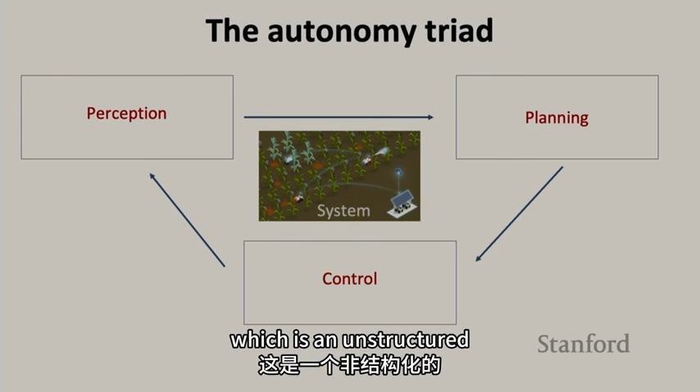The way I look at field robotics or robotics overall is kind of this triangle, right? You have perception, planning, and control, and at the middle of it is the system. One of the key things I really believe in is that all of these things have to work together. In order for them to work in the field, which is an unstructured, unpredictable, dynamic environment, they have to be in a way that they adapt and work together.

This is an example of some of the work I used to do back when I was at Georgia Tech. It's an aircraft that is flying, and then suddenly, in midair, it throws half of its wing off. What happens? This is the reason why we have pilots in airplanes - what happens when such emergencies come up? So how can we create autonomy algorithms that adapt to these changes, that work through these uncertain environments, and bring that AI that's on there to the extreme?

Back in the day when I did this, a lot of it was model-based, using predicted models of how the aircraft would behave, planning and doing control based off of that. And you see it actually stays in the air and enters this stable limit cycle. This is the Georgia Tech Twin Star aircraft, which has about a 2-meter wingspan, and keeps flying with half the wing off - and with half the wing off, half of the aileron is off. The journey for me since then has been, how do you bring this adaptability into robots so they can work in real world environments and deal with real challenges and do useful things?

Overall, I'm not the only one - there's a pretty large community that works on field robots. When you think of field robots, you kind of think of these types of things, right? Legged robots, bipedal robots, driving robots. I've been a part of several workshops.

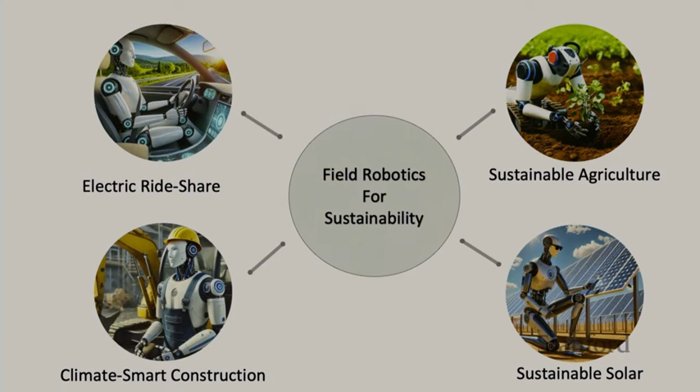But I purposefully picked these pictures because you see there's these humanoid robots trying to do things. Just as silly as it is to have a humanoid drive a car for your autonomous driving, I want to make the point that the robots that actually end up being successful may not look anything like the robots that most people think of, and really have to be a co-design of the task and the software together.

A lot of this was inspired when I was growing up as a graduate student, by the work of Andrew Ng, and the first aircraft that did the flips, and of course Sebastian, whom I heard a lot about at MIT, because the team that competed against Stanford was MIT, which didn't win. But a lot of the effort that these early robotics engineers put in was towards co-designing hardware and software, so that we have reliable robots.

So here are my main points. Where are the field robots? They're stuck in labs. How do we get them out of the labs? We need to think about scaling up, continuous learning and adaptation on the fly, and performance in the open world, not in structured environments, and common sense.

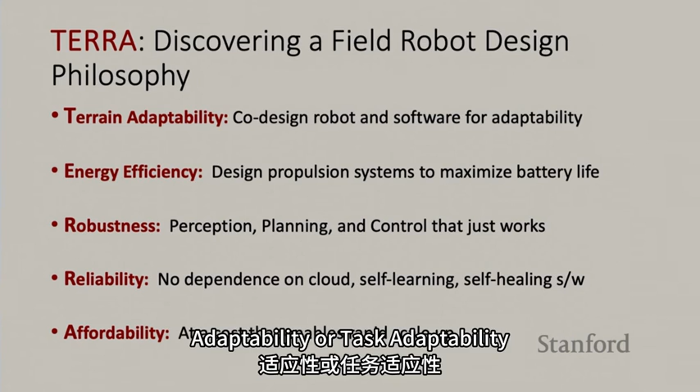Towards that, the journey to date has been discovering a philosophy, which I called the TERRA philosophy. The T stands for terrain adaptability or task adaptability, E for energy efficiency, R for robustness, reliability, and affordability.

So what I'm going to do now is show you four or five examples of robots that we created while discovering this philosophy, describe the journey and the impacts that these robots are right now causing. First we'll start with agriculture.

Agriculture, as you know, California is huge in agriculture, one of the largest agriculture producing states. The agriculture here is quite different than that in the Midwest, where we do a lot of corn and soybean agriculture. The key tenet of the agricultural robotics work I'm doing is that there's this labor bottleneck that's causing unsustainable practices to be used. The idea is that robotics and AI will help alleviate those labor bottlenecks.

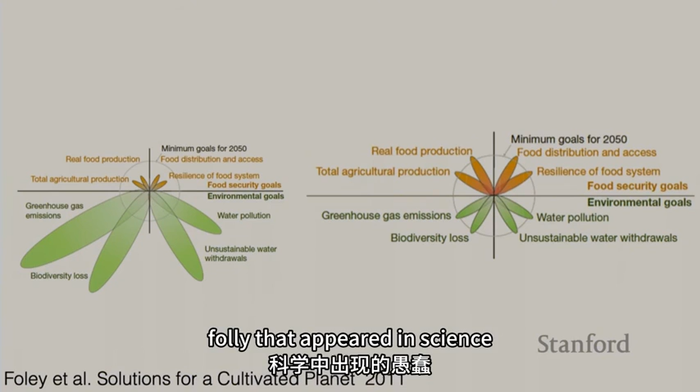This is an interesting paper by Foley that appeared in Nature. It talks about what is the cost of producing food today compared to the amount of food we're growing. You might have heard how we're going to be 10 billion people in the next few years, and that's going to be a big problem. We need to increase the amount of food we're growing, but we also need to control the cost - the environmental cost: greenhouse gas emissions, biodiversity loss, water pollution, water withdrawals. This is called sustainable intensification.

So how do we do this? One of the most unsustainable crops out there is corn. There's 200 million acres of it in all of the I states, and it's what we call a large-scale monoculture - you take large swaths of land, clear it of everything else, and just plant corn. Because you're moving the prairie away from its natural state of equilibrium, you have to put a lot of chemicals in to make that work: herbicides, fungicides, fertilizers.

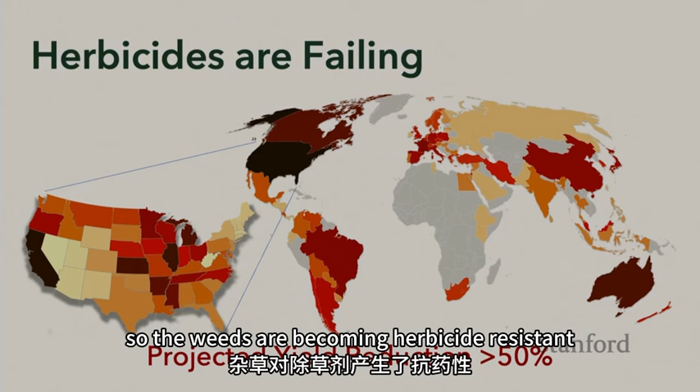But the problem is that this system of large-scale monocultures is not only unsustainable, but it's failing. You might have heard of pesticides in your waters, but there's also a huge challenge with herbicides that folks are using - the weeds are becoming herbicide resistant. This isn't mythical, you actually see it now. If you drove down in Champaign a few years ago, we didn't have a lot of weeds visible. But now, close to the end of the season, you see these weeds popping up out of the soybean crop, to a level where sometimes it's impossible to harvest.

This, according to some people, is a real doomsday kind of situation - the large equipment that we use to enable these large farms. A normal farmer in the Midwest will have 2,500 acres of land under control.

It is not contiguous land. It is parcels of land distributed all over the place, and the only way they get anything done is by using these very large machines. But these machines cause soil compaction, erosion, and nutrient loss. And on the other side of the world, if you look at another very unsustainable crop, palm oil, crops like that cause significant deforestation and loss of biodiversity.

And even with all of this, just with corn and soybean, the trends are that our yields are not actually matching the demand.

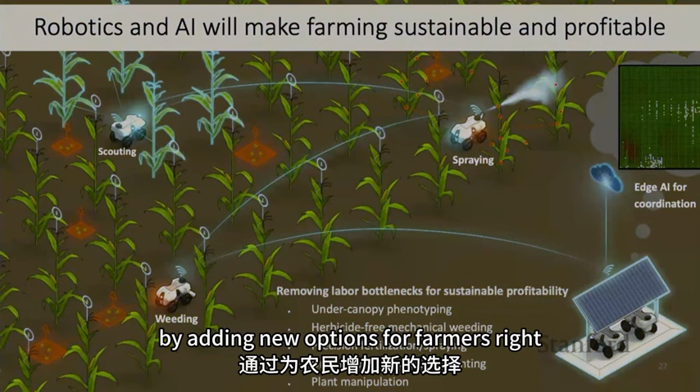So one way to address this challenge is by adding new options for farmers. Today farmers can either use manual labor or use large tractors. Manual labor is great for small-scale farming, large tractors are great for very large-scale monocultures. There's really nothing in between.

So one of the ideas we started thinking about 6-7 years ago was, can we use a number of small robots that can work together and do things that are today not possible due to unavailability of labor, such as phenotyping, mechanical weeding, cover cropping. I'll talk a little bit about some of these things.

And this idea of robots in agriculture is not very new. People have been talking about this for at least 10-15 years, but it's very challenging. Even though there's a number of companies out there trying to do it, the problems are really hard because the scales are very large, the field is very messy, and whatever data there is, it's not really representative of what actually happens in the environments.

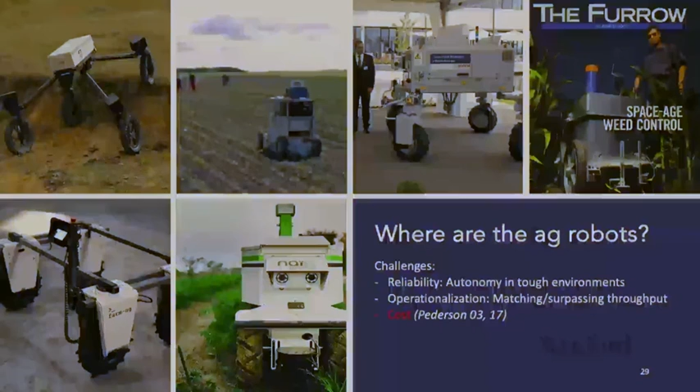So where are the ag robots? Even though you see a number of these companies coming up and robots coming up, we haven't really seen large-scale adoption. And if you really peel the onion, and there's a lot of interesting work on this, everything boils down to cost.

So we cannot use the same ways or methods that we're using for autonomous driving, in which we're using a lot of sensors, kind of over-sensing the problem, mapping everything out. We have to find ways in which we can reduce the cost while also making the robots work.

So this is something we came up with, this idea of levels of autonomy for robots. We need to grow up the levels, and about level 3 is when we have what some people call the MVP, the minimum viable product, because you're using a team of robots to basically get the work of a single tractor done. You need to also at the same time bring the cost down.

So now I'll give you the first example of how we've been trying to do that. This robot is called TerraSentia. We have made about 80 of these, and I think you were involved in this robot. These are actually deployed in the field.

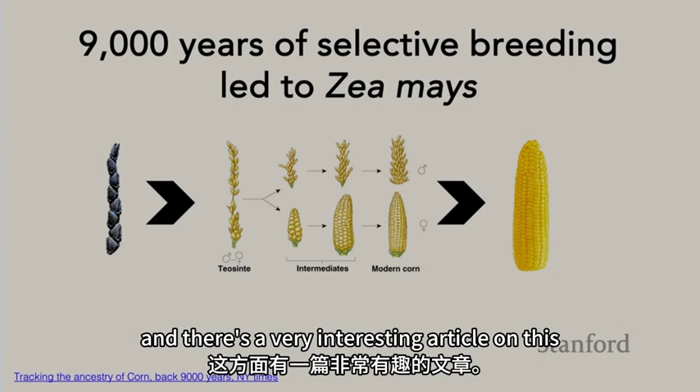So corn, which is everywhere in the Midwest, turns out it's actually not a natural crop, in the sense that if you go back through the history of agriculture, you won't find a natural ancestor of corn. What you find is this thing called teosinte, which looks nothing like corn. But the Native American people in South America selectively bred teosinte with other crops to create corn. There's a very interesting article on this in the New York Times.

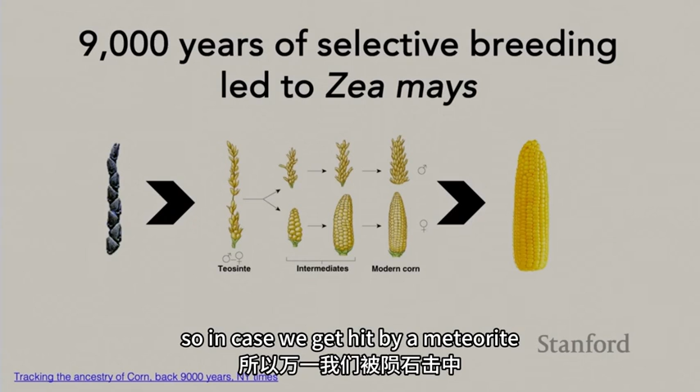It turns out that only about 3,000 years ago the latest varieties of corn were created. And right now, even under the North Pole, the modern varieties of corn are stored, so in case we get hit by a meteorite, we don't have to go 9,000 years back.

But of course, that pace of breeding cannot keep up with what's happening today. So the only way you can make a single farmer deal with 2,500 acres is to create seeds that are super adapted to the environment.

So in India, this is a joke that I used to make: in India, if a bug eats a plant, the plant dies. But in the Midwest, if a bug tries to eat a properly bred corn plant, the bug will die. So that's the idea, but the pace is just not matching up.

So in order to feed the world, we really need to accelerate this pace. To do this, modern crop scientists use a technique called genome-wide association, along with other techniques. What happens there is that you sequence all the genomes, measure the environment, and look for the patterns in the genomics that represent specific phenotypes.

For example, disease resistant, yield, right? And once you find them, your job is to use techniques like CRISPR to create the crop that accelerates those traits. But we don't have a model, we don't have a simulation of plants.

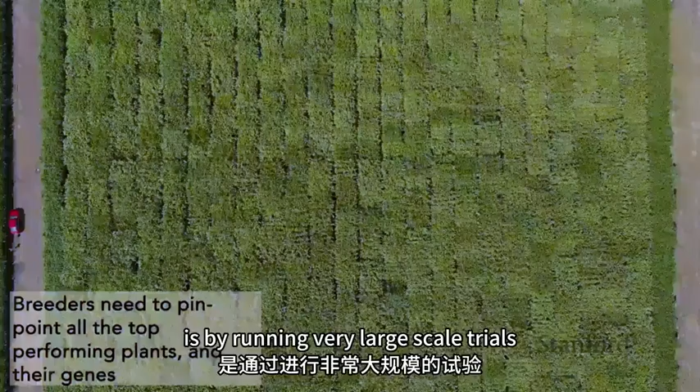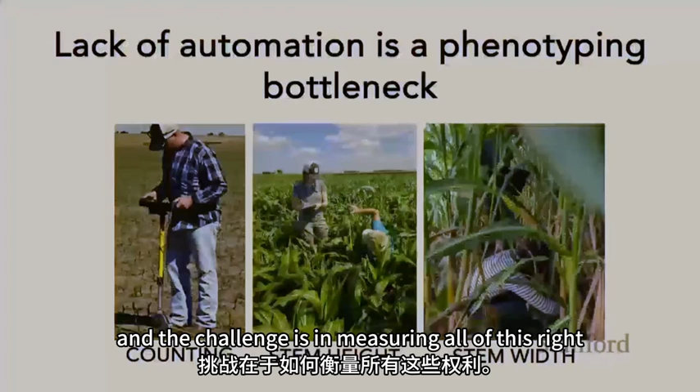So the only way you can do that is by running very large-scale trials. These companies run hundreds of thousands of acres of trials. This is one example of a 90-acre trial, a sorghum trial. Each of these blocks is a different variety of the crop, and they're being compared against each other. The challenge is in measuring all of this.

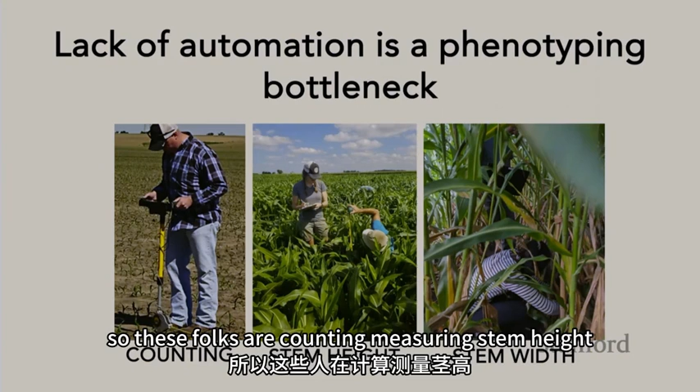So you get quantitative data to know which ones are doing better. Today, all of those measurements are manual, and this results in what we call the phenotyping bottleneck. These folks are counting, measuring stem height, stem width. These are really difficult things to measure and take forever. You can automate that using gantries or drones, but neither of those see under the canopy, which is where robots come in, but most robots are over the canopy.

So in 2017, we introduced this 3D printed robot called TerraSentia, which won the Best Systems Paper Award at the Robotics: Science and Systems conference. The idea was a small robot that can go under the canopy and use machine learning techniques to do simple phenotyping. In this case, it was counting.

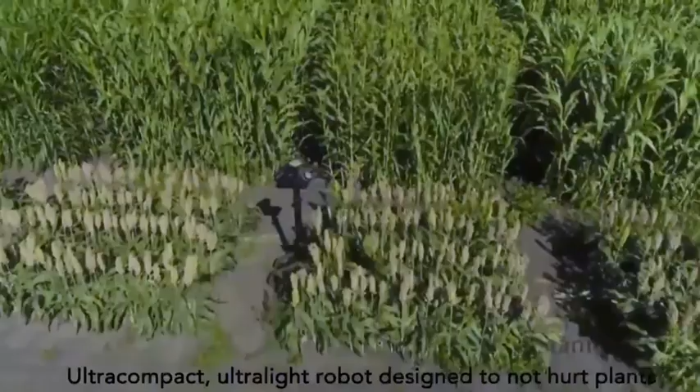The genesis of that robot was that before we started working on it, these were the kinds of robots that were out there. This is a robot made before I came to UIUC. It's a tracked robot, and people were using all these kind of best practices. People thought you have to make a tracked robot because it's the field. But you see here, this robot kind of drags that plant down.

You have to put a mast on it because you want to see down, and you have to put the most expensive sensor that you can find on it. But the reality was that while that was an expensive and interesting robot, it actually didn't do the job it was supposed to do.

So that's where, as we learned from the world of drones, miniaturizing a helicopter was not the solution. We had to come up with a drone which is not something a human would fly, because it's impossible to fly until you put an IMU on it. So a student of mine came up with this idea: why are we trying to do all of this? Why don't we just take our drone and make it run on the ground? But obviously you cannot fly it through there because the endurance just wouldn't be there.

So we came up with this 3D printed robot, and I think it was just a very basic idea of taking those motors and flipping them down, each having their own motor, with no other moving part, and then putting a camera on there to see how well that works.

We made, who knows Steve Blank? Anyone know Steve Blank? Lean Startup, right? Stanford person, right, who created this whole philosophy of Lean Startup.

So we had an NSF I-Corps project, and we went and engaged with customers. We made 30 of these 3D printed robots and gave them to customers, and said, okay, we'll go use them in the field, we'll see how well that works. And literally some of them melted in the field, because field environments are very difficult.

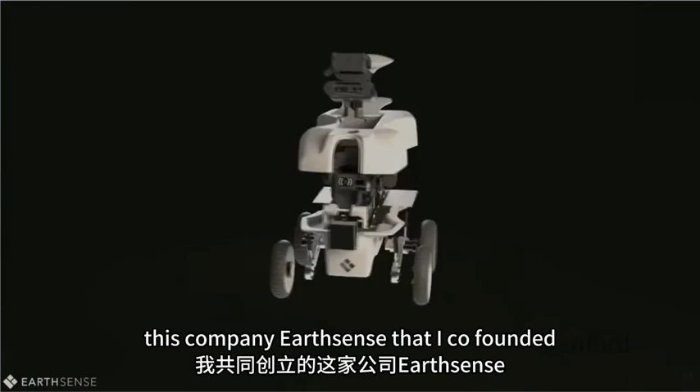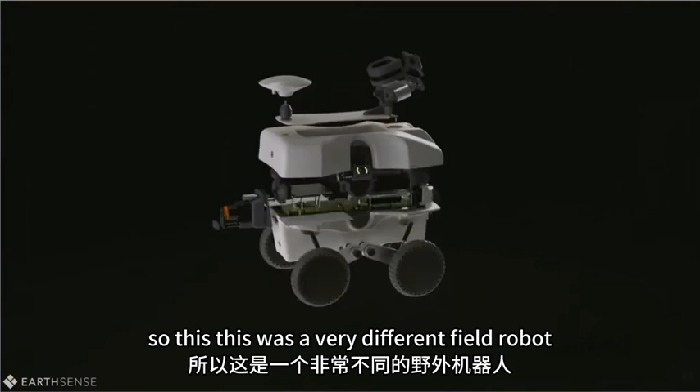So at around the same time, this company EarthSense that I co-founded took over that project and became a technology partner in the ARPA-E TERRA-MEPP project, and created this robot called TerraSentia, in which Rajan was a part of creating the drivetrain. So this was a very different field robot compared to the ones that were out there.

It was made with hub motors, so each wheel was itself a motor. There were no connections other than that, so directly you connected your arm to the wheels. These motors, because they're hub motors, are contactless, brushless hub motors. They can go through water, snow, and all kinds of different terrain, and the robot was extremely tough, as shown in this example. This was, I think, the 2020 or 2021 version of that robot.

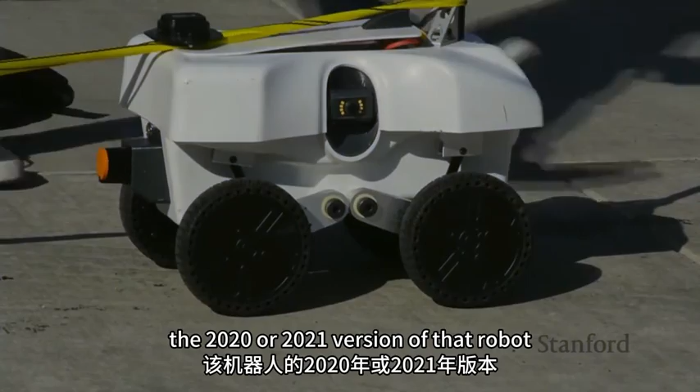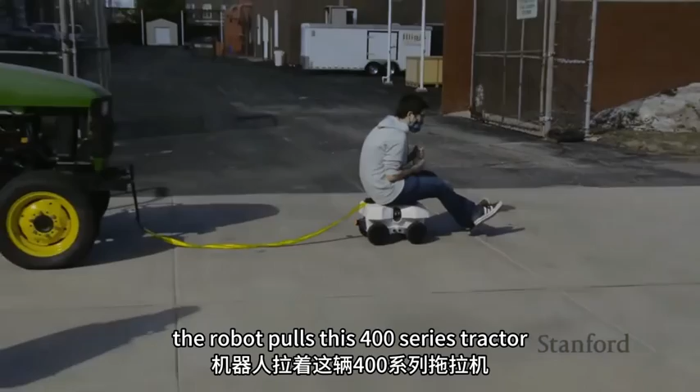We iterated across 3 years, and every year we try to improve the robot, finally bringing it to this level of maturity. So this is one of our engineers just loading up the robot with some weight. The robot itself weighs no more than 20 kilos. Then he's sitting on it, and the robot pulls this 400 series tractor. I think it was very interesting getting into the design space there and figuring out how we can use electric propulsion to make sure we pack a lot of power into very tiny machines.

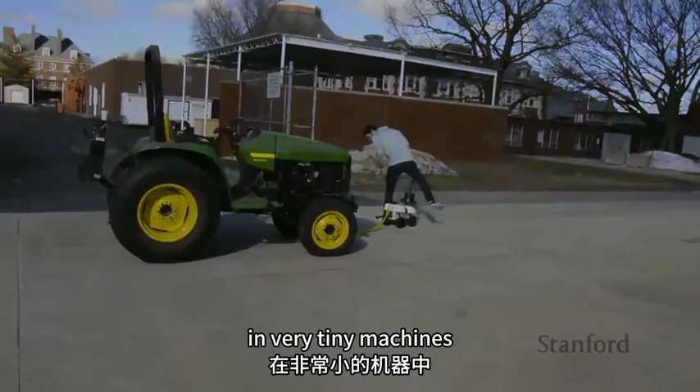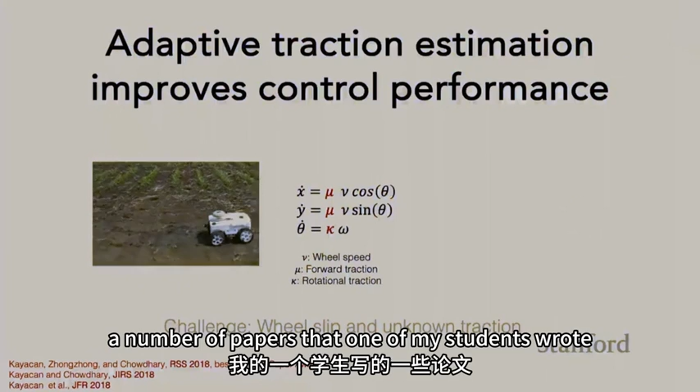That was one part. The other part was trying to get these robots to be autonomous. The standard way of doing that is with Global Positioning System, GPS. It works great on John Deere AutoTrac and Trimble's GPS systems because they have a clear view of the sky. But once you go under the canopy—and we did a lot of work on this, part of a number of papers that one of my students wrote, who's now a professor at University of Oklahoma—we figured out traction coefficients in real time and used them to improve control, using techniques like model predictive control and receding horizon estimators to really improve the accuracy of GPS. But the problem is, once you go under the plant canopy, whereas with real-time kinematic RTK GPS you're supposed to get under 2 centimeters accuracy, the accuracy drops to 40 centimeters.

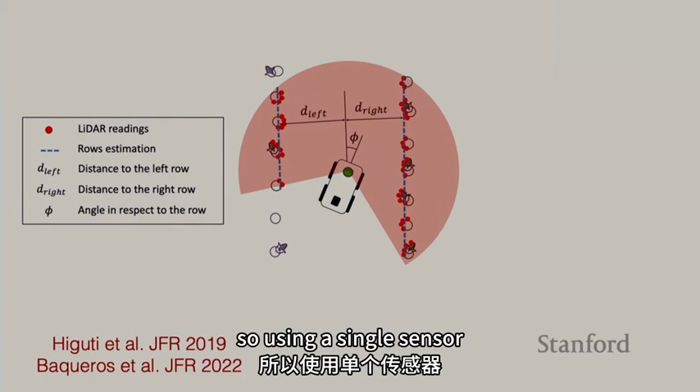Because the signals bounce off of the plants, we started around 2019 working on how to solve this problem using exteroception. We posed this problem as a row-following behavior problem: using a single sensor, can we figure out the distance to the row and the angle to the row?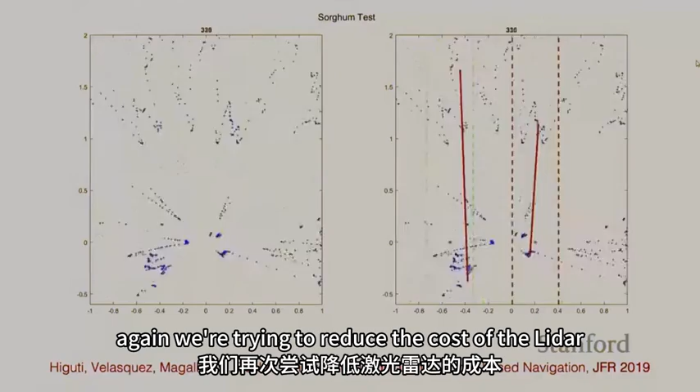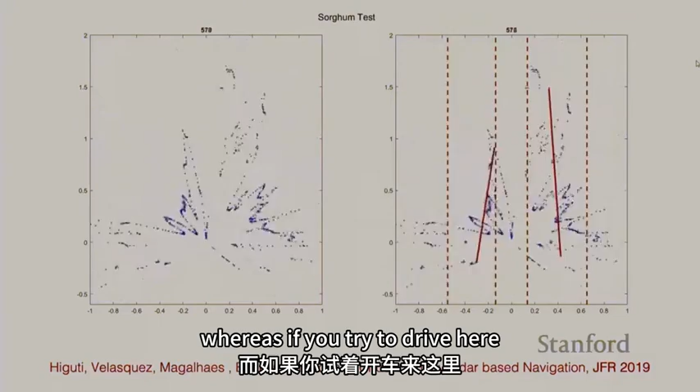In a setting like here, this is a LiDAR point cloud. The LiDAR is here—again, we're trying to reduce the cost of the LiDAR, so it's a $1,000 LiDAR. These are all the plants here, and you see it's a completely messy point cloud. Whereas if you try to drive here, you'll get a very nice line on which you can fit a line. So fitting lines on that LiDAR point cloud was one of the first key challenges we had to solve.

That's explained in this paper here, and we came up with a method that was basically an accelerated form of line fitting in the presence of outliers, and then we created that and put it onto the robots. This is an example of me giving that robot a hard time as it's driving down the field with this algorithm on it.

This is kind of where we started forming this philosophy that, okay, you can write a paper, you can create an algorithm, but the real test is to go out there and see—can you kick the robot? That's what I tell my students: your robot has to be kickable before you can graduate.

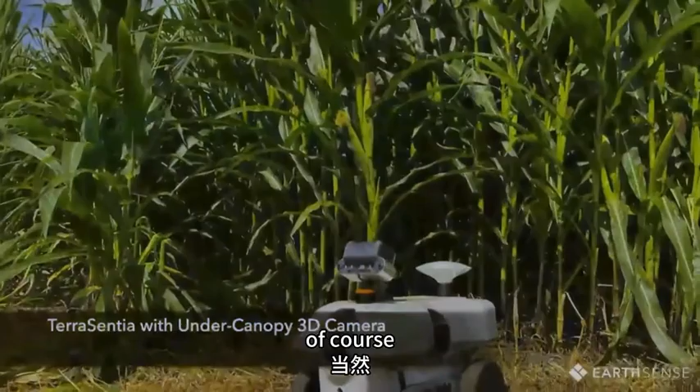Here you can see it's a very tiny sensor right here, and the plants are all around it. With this EarthSense, this was just a part of it. Of course the company did a whole other set of development that is proprietary, but they created this first product that started to make sense in the space of agriculture.

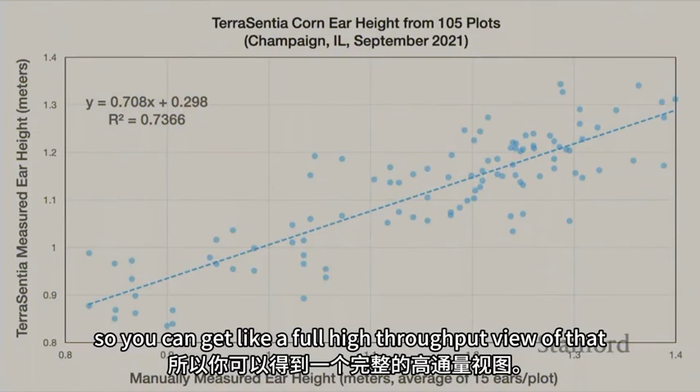So taking that same idea—this is just measuring, and it's limited to crop breeding. We wanted to bring that idea to farmers. In the Midwest, agriculture is very seasonal. Right now, when I left Chicago, the temperature was 18 degrees Fahrenheit—it's freezing, and there's basically nothing that lives. So from basically November all the way into March, we leave these 200 million acres entirely bare.

Before planting happens around June or late May, weeds come up and the soil degenerates and all kinds of things happen. But there's a way this soil could be doing useful things.

You can grow cover crops on it, and cover crops can do a number of things. They can sequester carbon, fix nitrogen, hold nitrogen that's excess, and break up compaction. So different types of cover crops can do different things.

There are also cover crops that can be used for harvesting, like they can create biomass that can be used to create sustainable aviation fuel, for example. But most farmers are not able to do it.

This is around Thanksgiving. If you try to land in Champaign, you see what I call the corn and soybean desert—just acres and acres of bare land.

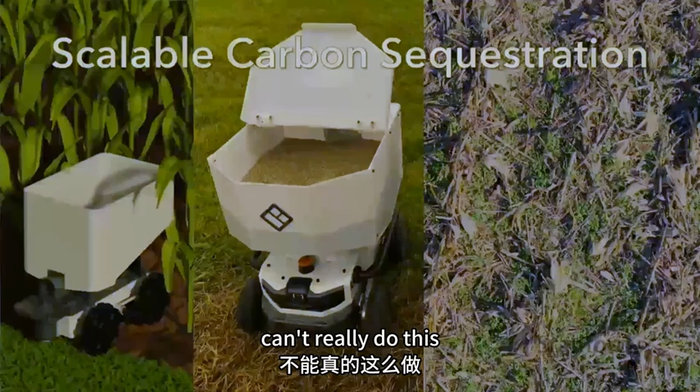So we had this idea: what if we created a robot that could go through the canopy and broadcast seeds? Using the same kind of technology we were using, but broadcasting seeds so we can have cover crop planting done as early as August in standing corn.

With a lot of economic analysis, we can show that it can be done at a much lower cost. But the problem is you need to bring the cost of the robot further down, and you need to make it more reliable.

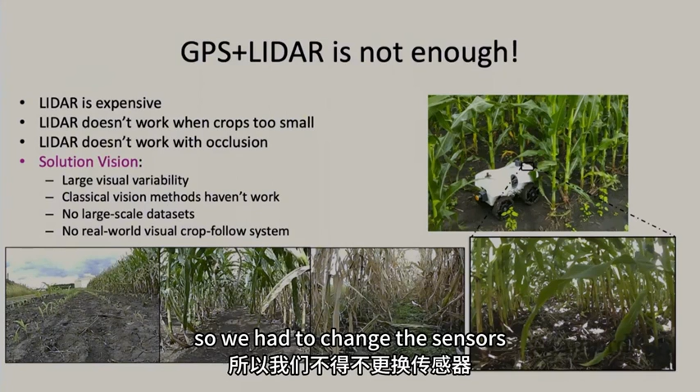So LiDAR-based autonomy is just not enough. We had to change the sensors and think about using cameras. These cameras cost $30, whereas the LiDARs cost about $1,000.

But that's a very challenging problem, because fields are really messy when you try to do it with monocular vision. So we worked together to create a method called CropFollow, and Arun, who is about to graduate, worked on this.

We thought about many different ways of doing it. One way is using techniques like reinforcement learning, where you basically learn everything from scratch and try to see how that whole setup works. But the problem with that is it's really difficult to debug.

In this high mix, low volume manufacturing setup, these robots are individually very different, and because of that, it becomes very, very hard to find where the issues are. Of course, we had a fully working system also.

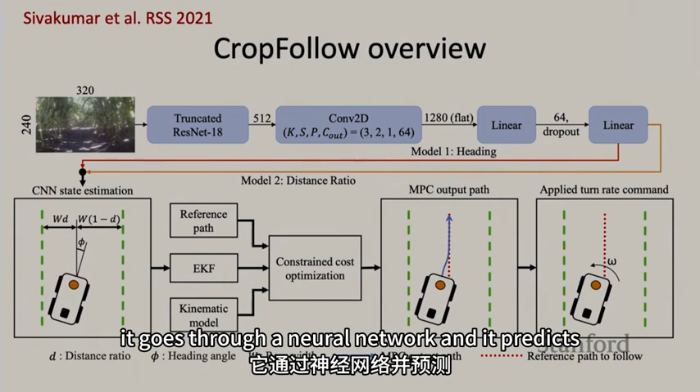So what we did is we just swapped this distance and angle estimation with vision. We said: can we find distance to the row and angle to the row with a single vision? So you have a single monocular camera—an image from the camera goes in, it goes through a neural network, and it predicts the distance to the row and the angle with respect to the row.

This was back in 2019, and we did it with labeling—heavily supervised learning. We labeled about 26,000 images, using all kinds of techniques where you can correct the image when you don't see the horizon. We use the plant as the way of seeing the horizon, measure the roll and pitch, and then get a good estimate of where the crossing points are.

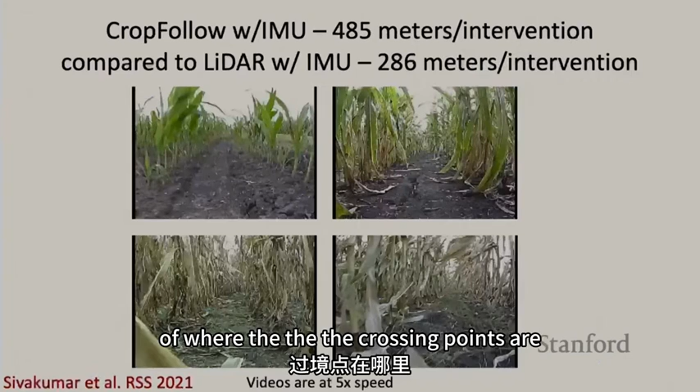We used that to train this model, and then we started testing it in the real world, and it worked really well. These are some examples of this vision-based autonomy. You can see the terrain is really challenging, and the robot is able to tolerate early season, late season, a small curve, and significant occlusions.

So we deployed this, and this is Arun—you can tell he's ready to graduate because he's starting to kick his robot now. He's a lot more gentle, although there's a number of other things that were also changed.

As you can see, the robot is also controlling its speed now. There's a little planning module on there which is trying to control the speed as well as the angle of the robot to make sure that it's going on its path.

Can you see the plants? This is early season soybean. Obviously the LiDAR isn't working because the plants are not as tall as the LiDAR. And then after a while, the robot will enter early season corn.

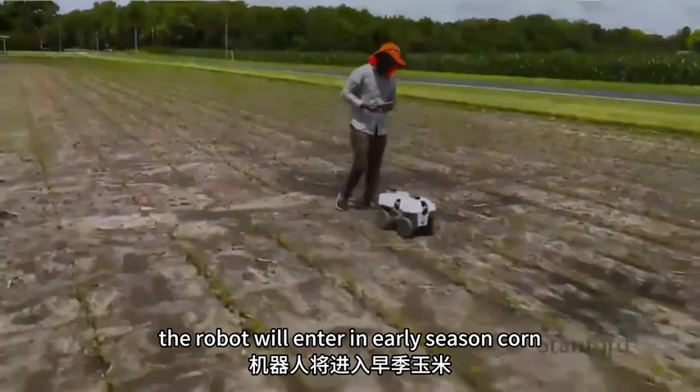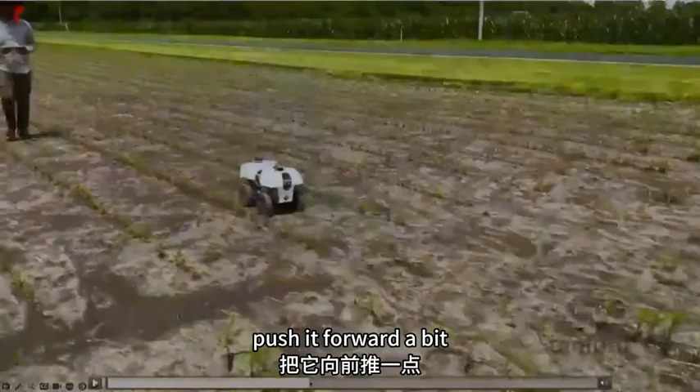The same, just going straight. This is at the Farm of the Future at Illinois. So anyway, let me see, just push it forward a bit. Yeah, so it just seamlessly transitions into early season corn and continues to go.

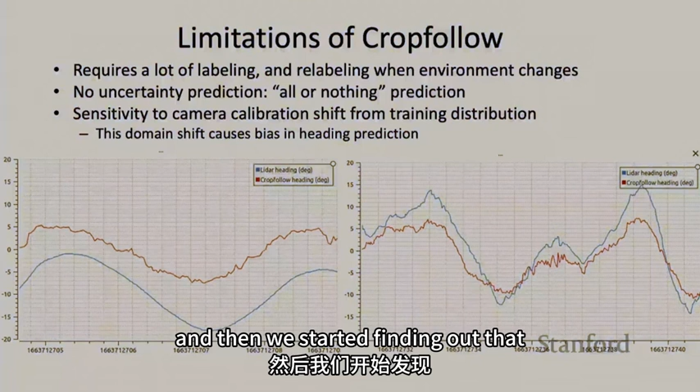So this was great, and then we took this and several other methods and tried to do a large scale experiment with it. We started finding out that even though everything worked great in the paper, and we got very large sets of validations in an RSS paper, about 25 kilometers I think, the fact is that when you deploy it beyond that, we started to see a lot of issues. One issue was that the environment changes.

There's really no uncertainty prediction. Because the environment changes, we basically end up with a domain shift. And because the cameras on these robots are differently calibrated and installed with slight defects, what works on one robot doesn't work on the other. There are little biases that creep up.

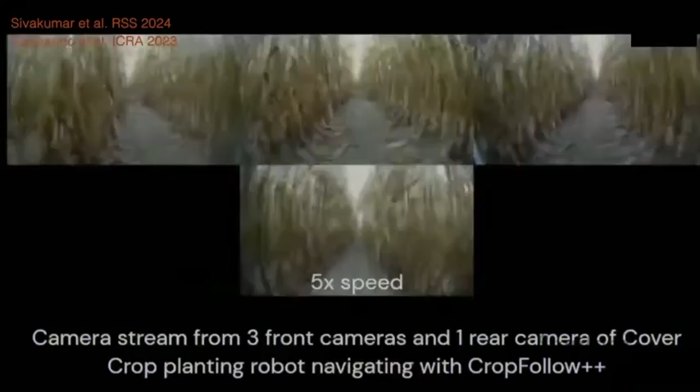So last year, this year, 2024, we published another paper called CropFollow++, in which instead of doing the full angle to row, we're basically creating a confidence estimate of where the horizons are - so 3 points: the end of the horizon point, and the 2 points here at the side - and then combining that with AI to detect failures and recover from failures when they happen.

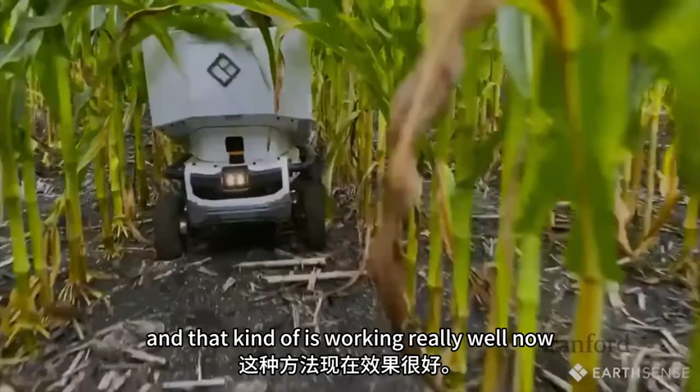So this is an example of that happening. There were two sets of papers: one was the 2024 RSS paper, and the other was the ICRA 2023 paper, which kind of put that together. And that's working really well now, and that's what creates this idea.

So you have a robot which can go through standing rows of corn and distribute seeds of cover crop together. And there are new types of distribution methods that are now coming out. Each robot can cover 9 rows - 4 rows on one side, 4 rows on the other side, and the row that it's in.

So if you have 10 robots, you can cover 90 rows at the same time. Driving at about 1 meter per second, these robots can get a whole field planted in less than 5 hours - a whole field the size of 100 acres. So that starts to compete against other methods. And by the time you harvest, there's already a standing cover crop there.

We have a large grant now to try and scale this up, with a target of many thousands of acres next year, and trying to really bring this technology to fruition.

Now I'll talk about another example of the Terra philosophy with a robot called TerraMax. This is now all the way on the other side of the world in Malaysia, in palm oil plantations. Palm oil is one of the most consumed oils - apparently 50% of supermarket products have palm oil.

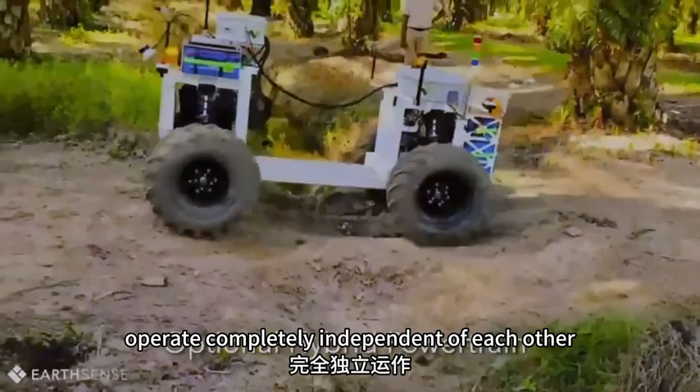It's a 500 kilo robot, much larger than our other robots. It still uses the same types of techniques - individual wheel motors, no variable transmission shaft, so there's no transmission. The four wheels can operate completely independent of each other, each with their own suspension. It can tackle really challenging terrain, and the middle part is open for putting different types of payloads. In this case it's a fertilizer bin, and you'll see it does some fertilizer spreading. It's a fully electric, battery-operated robot, and we're learning a lot about optimizing the motors to do this. Just as a comparison, that's Terra Sentia, and that's TerraMax - it's a totally different robot.

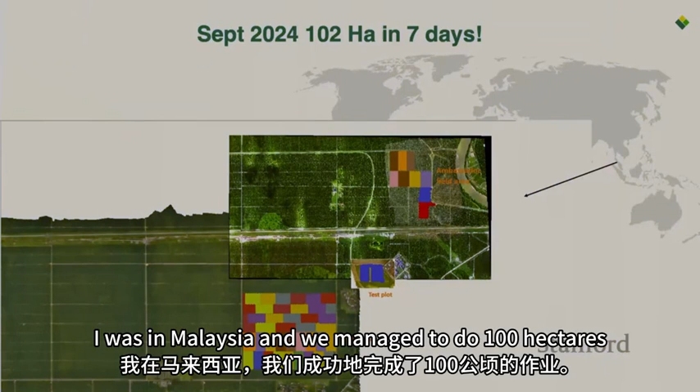So in September I was in Malaysia, and we managed to do 102 hectares in 7 days. It was a challenge set forth by the industry to see how scalable this technology would be, and it was quite exciting. Here's just some snippets.

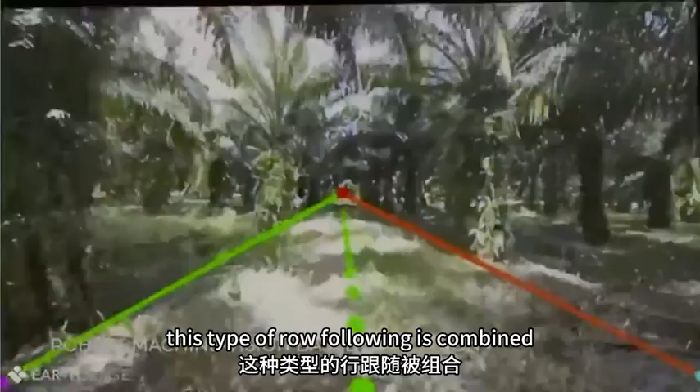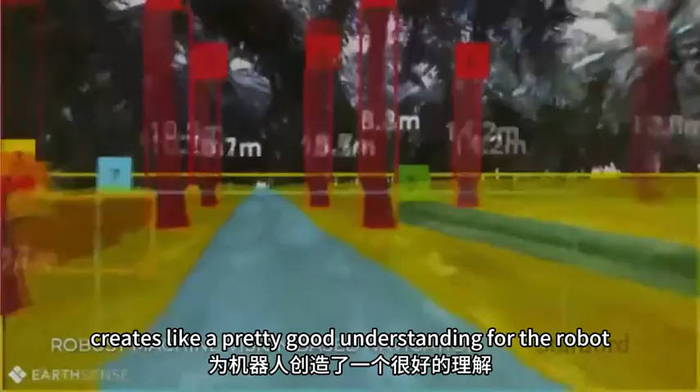From a research perspective, these robots use some of the techniques I talked about, but way more than that. They ended up using a technique where row following is combined with semantic segmentation. Large-scale semantic segmentation combined with row following creates a pretty good understanding for the robot of where it is. That's combined with the GPS data it's getting, and then it's detecting individual trees, distance to the trees, and executing maneuvers.

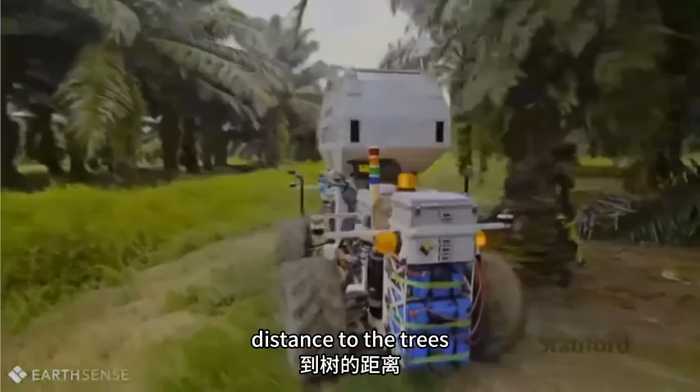It's quite challenging because there's a ditch right here, a ditch on that other side, a ditch here - it's a challenging environment. But it seems to be doing pretty well. We also have remote monitoring systems in place so we can keep an eye on what's going on and get this robot to drive autonomously.

Everything here I'm showing you is autonomous - that's the benefit of not having a transmission. The wheels are totally imbalanced, but the robot is able to go through some really tough terrain. That's my engineer - she's just delighted that it tackled that.

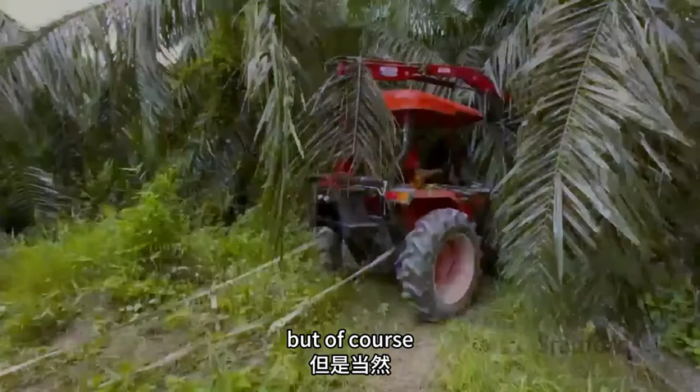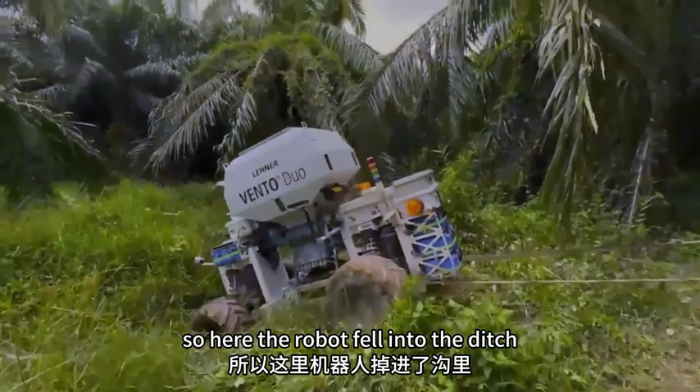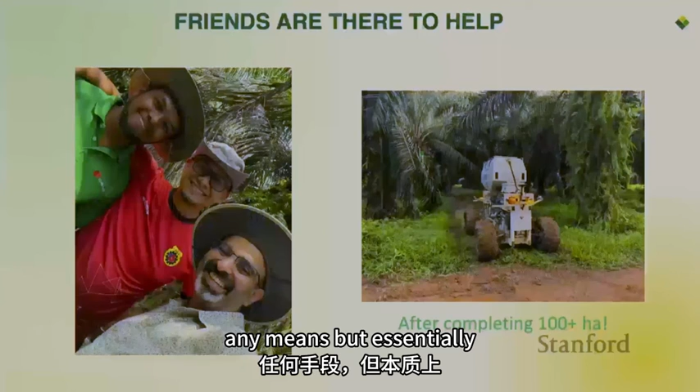It rains every day in Malaysia, so you can't avoid muddy puddles, and even with that, the robots fall down. One of the big lessons we've learned is that you really cannot try to make the whole system fully autonomous - you have to think about increasing throughput. Here the robot fell into the ditch, was pulled out by the tractor, and immediately resumed work. It was not a showstopper by any means.

One of the big philosophies coming out of it, after completing the 100 hectares, is that you really have to find ways for humans and robots to work together, as opposed to imagining robots will completely replace humans, because we're just not there yet. Even if you put the most expensive sensor you can find, you still need somebody to clean it eventually, unless you put a cleaning system - and then the cleaning system breaks. So I think we have to start thinking about robotics as an assistive technology.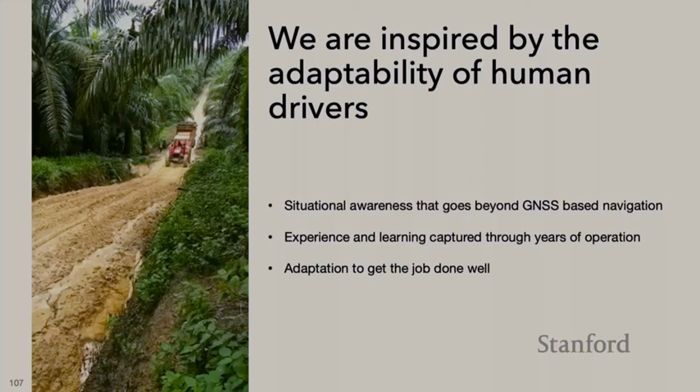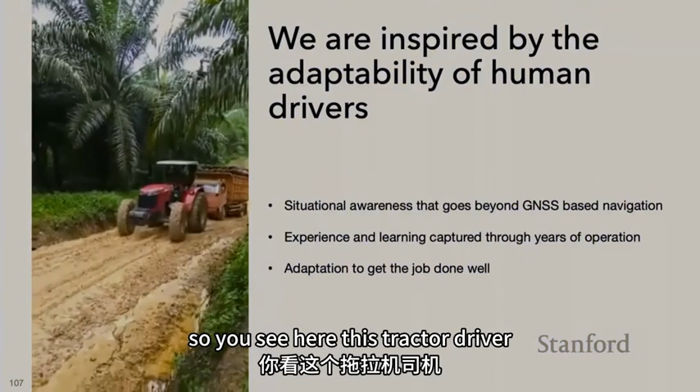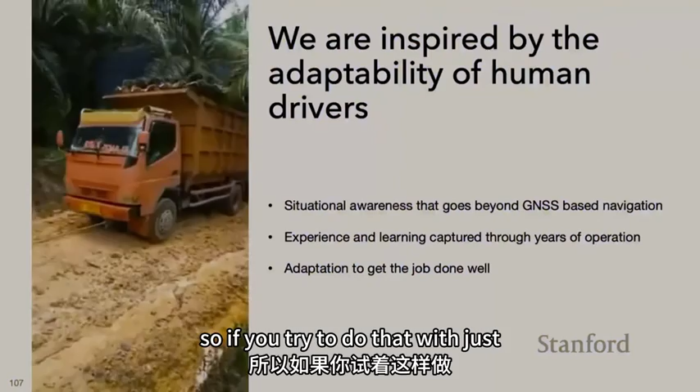The other thing I'll talk about now is some of our work in broader field robotics, algorithms for driving robots, and this method called WayFast. You see here this tractor driver, just using their eyes, is pulling this very heavy truck on completely muddy terrain. If you try to do that with just GPS or something, it's just not going to work. You have to have experience built in and real-time adaptation to deal with that.

So we've been thinking about how to encode that in software, and one way of doing that is what we call WayFast, which is waypoint-free adaptive navigation. You give only a single waypoint where the robot has to go, and the robot gets data from its sensors, like stereo cameras, and creates a traversability and traction map just based off of that data, just like a human would do.

This is a fully self-supervised method that takes in an image and creates a traction map, which becomes a cost function for a controller that then generates a path for the robot. The way we do this is we start with a standard robot model, which is really cool because we can easily swap this model whenever the robot changes, so the system is pretty scalable. And we add to it these traction parameters that we talked about before.

We estimate these traction parameters in real time, and that becomes the labels for the images that the robot creates. So in training time, the robot's driving around, estimating traction as it drives, and that data is correlated back with images. Those images are then used in the exploration stage for training. Here, for example, you can see as it's going around, the robot hits different things, and the traction it experiences is encoded by itself.

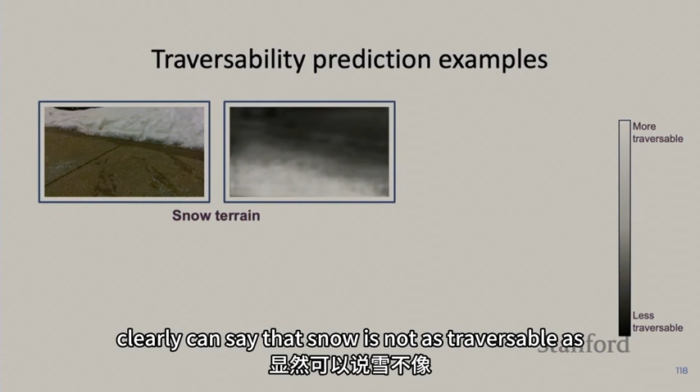So then you take an RGBD image and create a traversability map using that data. That traversability map becomes a cost function for the model predictive controller, which creates the actions that drive the robot. You see some examples here: white is traversable or with good traction, and dark is not. You can see the robot clearly can tell that snow is not as traversable as clear terrain.

Similarly with trees, and not only that, it also creates a boundary around it because it knows once it hits it, it'll get stuck. And remember, none of this is with labeling, whereas the first bit I was showing you was all with labeling. This is all happening by the robot doing it all by itself. This is, in real time, an example of how the traversability map looks like as the robot is driving around.

You can see these are the areas that are not traversable, and then these nice behaviors emerge. The robot knows to avoid the tree, which is fairly geometric. But the other interesting thing is that obstacles that are not geometric, for example this ditch, it knows to avoid based on the visual data. And in this case, it knows it can go through grass because grass is traversable.

It doesn't really lose any traction there, but when it comes to the tree, it has to avoid it. On the other hand, if it was using a LiDAR, grass would look exactly as untraversable as a tree.

More recently, we've tried to take a batch of data in real time, like a sequence of images, feed it into the network, and create a 3D traversability map around the robot. This is what the robot creates, like a bird's eye view traversability map as it's driving, and these are all the different trajectories it's thinking about and picking one of them. You can get some really cool behaviors - again, it knows it can go through grass because it doesn't lose traction, but it will avoid trees.

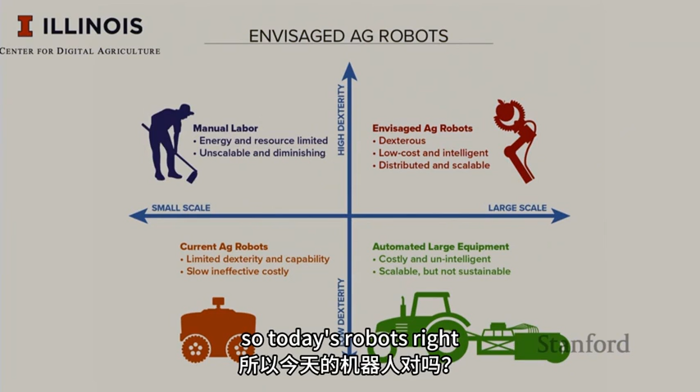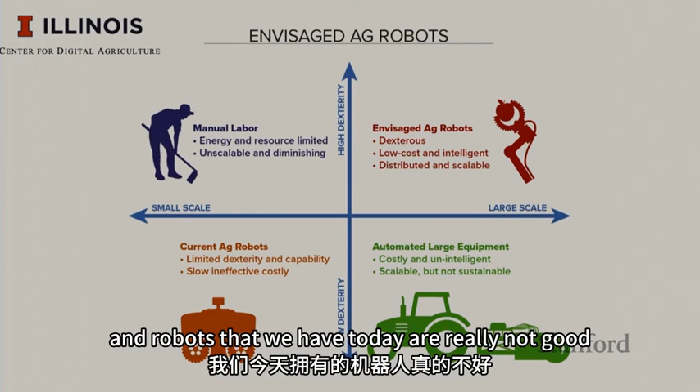Okay, this is the last bit I'm going to talk about, the philosophy of hybrid soft manipulation. Today's robots - tractors are really good for low dexterous tasks, but they scale up very well. Humans are really good for small scale tasks, they have a large level of dexterity. Robots that we have today are really not good at either of them. So the goal is to try and create robots that can have high level of dexterity as well as scale up well.

So towards that, we've been thinking about how to create different types of robots. I've been working with a friend of mine, Girish Krishnan, who's a professor at UIUC, as well as Mattia Gazzola and Sarah, who is an expert in polycultures, to create new robotic concepts that would work well in a cluttered setting like a polyculture, in which different varieties of plants are planted together so that they can grow together.

These arms are essentially called FREEs. They're basically tubes wrapped around with a filament, and each one is wrapped in a different way so that when you pressurize it, they bend in a particular way. By controlling the pressure and the wrappings on the different types of tubes, you can create muscle-like structure and bend these things any which way.

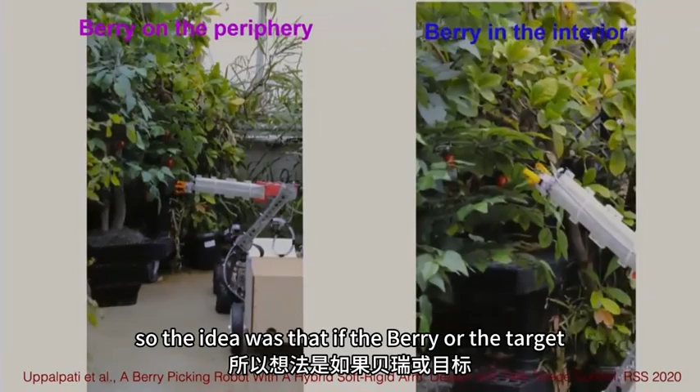In 2020, we had a paper at RSS in which we basically combined the FREE arm with a rigid arm to create a hybrid manipulator. The idea was that if the berry, or the target, is not within reach of the rigid arm, then you move the soft arm out and bend it any which way to get it.

The reason to do that is because the rigid arm is really much faster - you can move it really fast, but it doesn't have the dexterity. The soft arm can reach all these different places, but it doesn't have the speed. So can we combine it together?

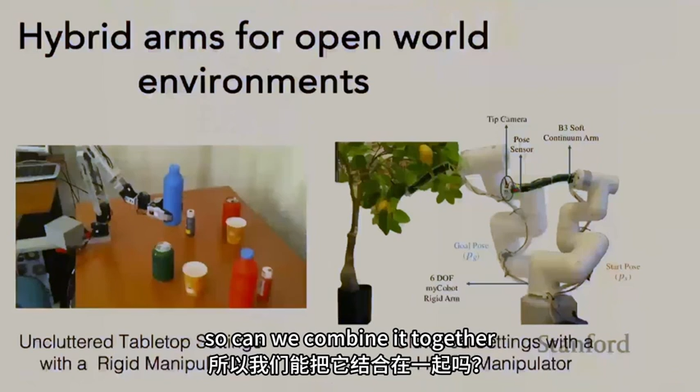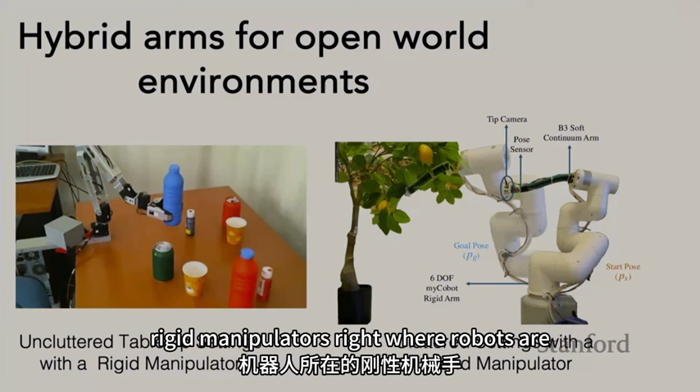I'll show you some results that aren't yet published, but hopefully soon will be, about trying to get these hybrid manipulators to work in an intelligent way. You must have seen a lot of this type of work with rigid manipulators, where robots detect objects, create 3D representations, and pick things up, and there's a lot of interesting work connecting these with large language models. We want to do the similar thing, but with these hybrid arms.

The way the pipeline works: you get an RGB image, we create a 3D reconstruction using a network called MASt3R, then there's a standard image segmentation network that can help find objects. This creates an occupancy grid, a mental map of where everything is. Then you make a path, and in planning the path you use a model of the soft arm, and this goes through another network and creates the actuation.

The idea is that by creating separate paths for the rigid and the soft part, you can make sure the rigid arm isn't bumping into or touching anything, but the soft arm doesn't have that constraint anymore - you can touch and coil around things. This work is still going on, but here are some examples of what we're seeing.

There's one single camera at the end of the manipulator in the soft arm, and we're using that to create these 3D reconstructions. I'll show you the video. In this case, the robot has to reach this bottle, and the data is coming from this eye-in-hand camera that's here, and you see that it's able to get to it.

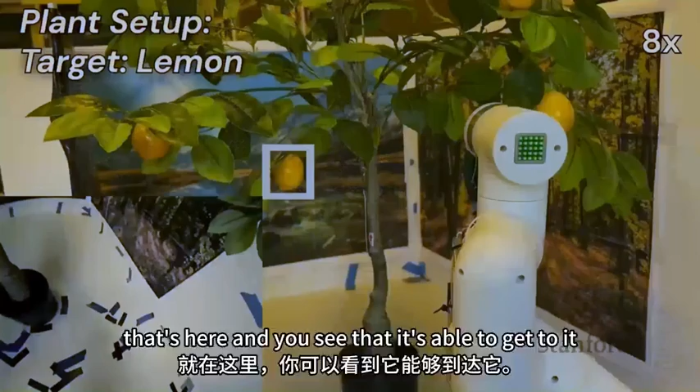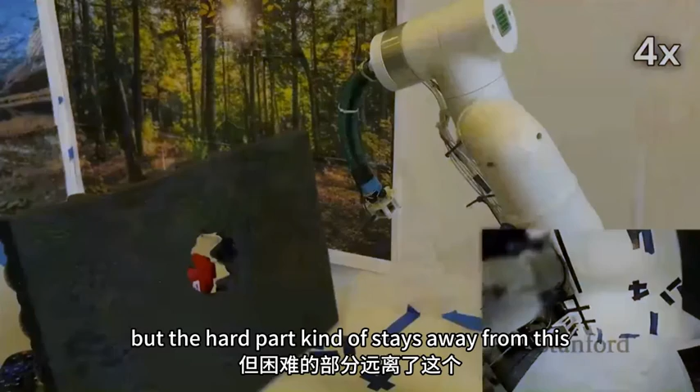In this case, it has to reach this lemon, and you see it'll basically go around that thing, moving the plant knowing that the soft part can touch and interact with the plant, but the hard part stays away. Then in this case, it's going to reach the hole, again using the same kind of technique. I guess the next time we show this video, the robot will have gone through the hole to do manipulation on the other side.

Okay, so I'll end here with a view to the future - one other application we're trying to apply the Terra philosophy to, and that's solar plant operations and maintenance. California is actually the largest solar state also - California has one of the largest solar farms, which is in Mojave, not that far from here.

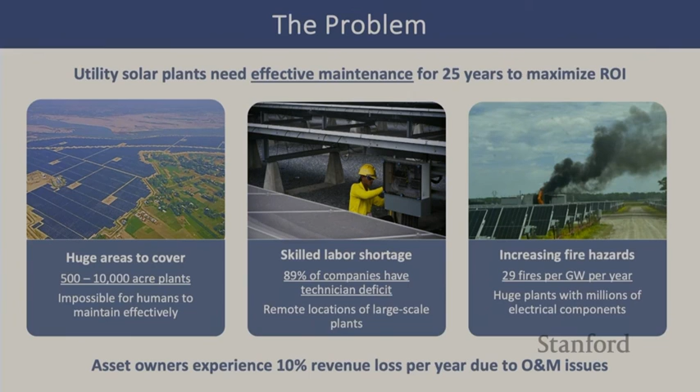And these are very large farms, right? There's like 10,000 acres under cover, and they have a payoff period of about 10 to 12 years. But the problem is that due to issues in manufacturing, due to grass that grows, due to micro cracks and things, solar panels and the surrounding stuff can actually catch on fire. And that creates a huge hazard, and there's a number of other maintenance operations that need to happen.

So one of the things that we're thinking about now is how can we use robots to go out there and use the same kind of technology that we have for under canopy navigation to get near the panels and do things like repair and maintenance.

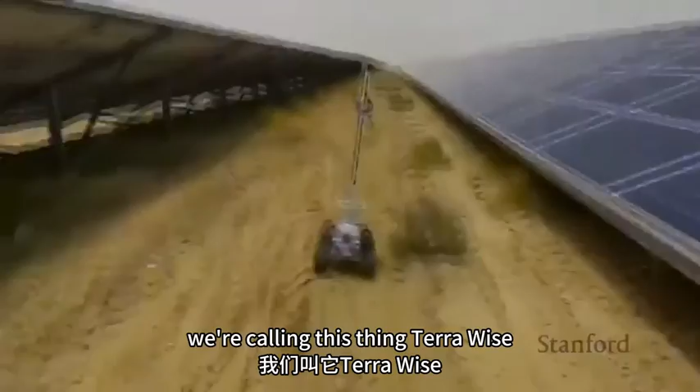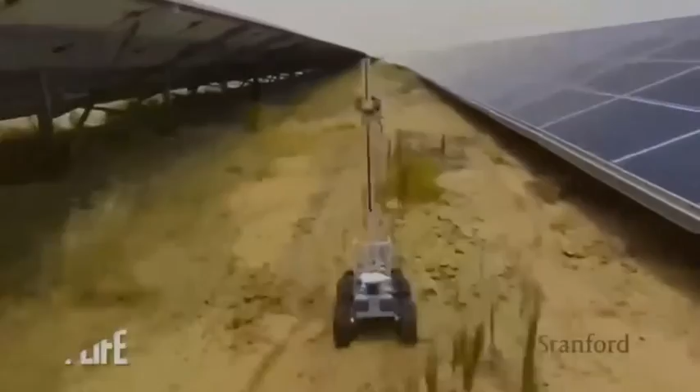So this is just a quick demo of this thing. We're calling this TerraWise. Again, it's a very simple robot, a prototype that goes through this panel. When it was driving, it was 50 degrees centigrade outside, so pretty hot. It has cameras on it that can help it find things like combiner boxes, MC4 connectors, things like that. So it's pretty interesting. It's early days for this technology, but interesting to see how it evolves as these robots become more practical.

Okay, so I want to end it here. And one of the things that's really fun about the work that we do is it brings together a whole different variety of people across the campus at UIUC, from the engineering quad to the agriculture quad, to socioeconomic people and extension, which is how the university engages with farmers.

And then I wanted to end with this fun graphic here. MIT Technology Review had this article just a few weeks ago, and robots are coming, right? That used to actually be the title of my earlier talk. That's why I changed it to Where Are the Robots? So robots are coming and they'll do all these amazing things, but the reality is that robots are AI embodied. And if you don't think of co-design of the hardware along with the software, it's very difficult to get to a point where the robot will be task effective. And then people often complain that what I really wanted is robots that would do my laundry, but what I have is a large language model that will write me poetry. So both things are useful.